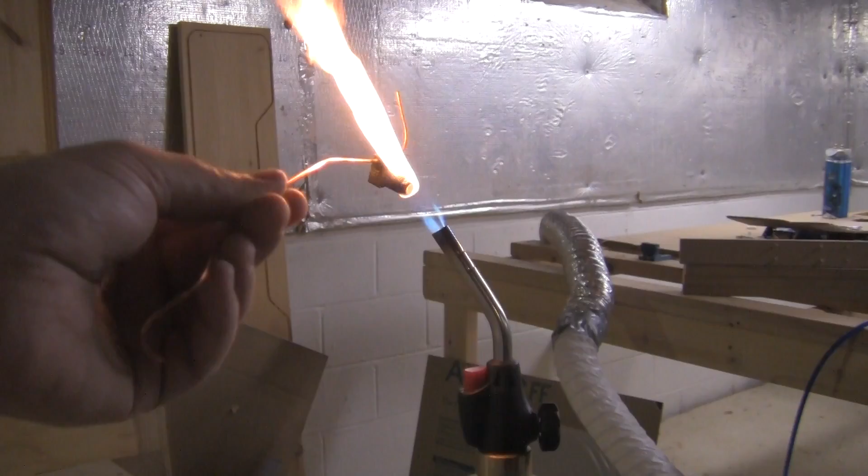It's been over 2 months since the last proper video, but I've been really busy. I designed a CNC router, I've been working on Nephele's Pelvis. In this video we're going to talk about the gearbox for Nephele's Pelvis. I'm going to give you a preview of what's to come with the router.

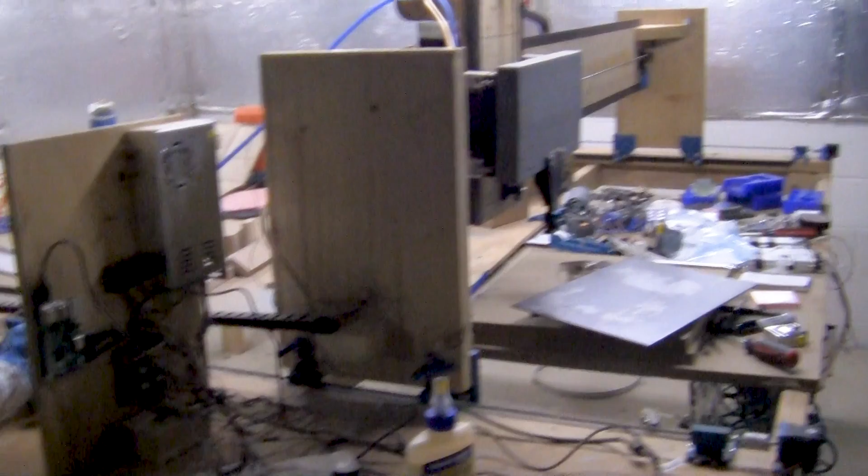Let me start by talking about the FerrousCNC. It's an all-steel CNC router. I wanted something a lot more rigid than the flimsy wooden one that I built down in the basement. So I designed and am in the process of building an all-steel version of that, should be extremely rigid, more than capable of milling and routing various types of materials.

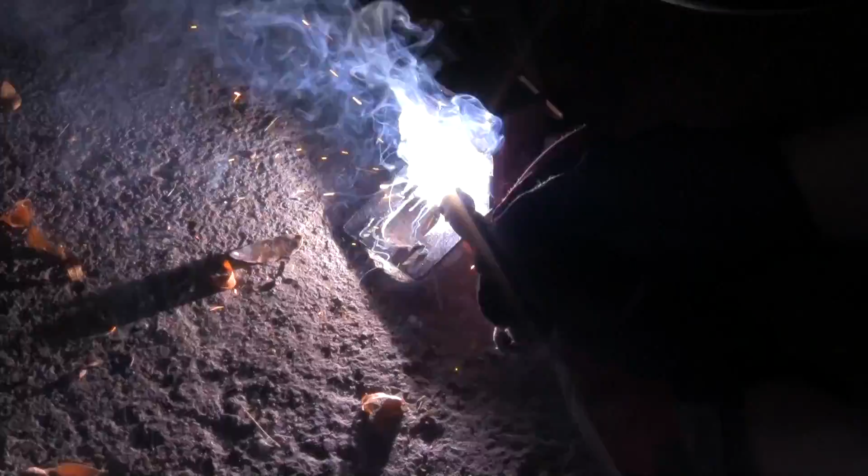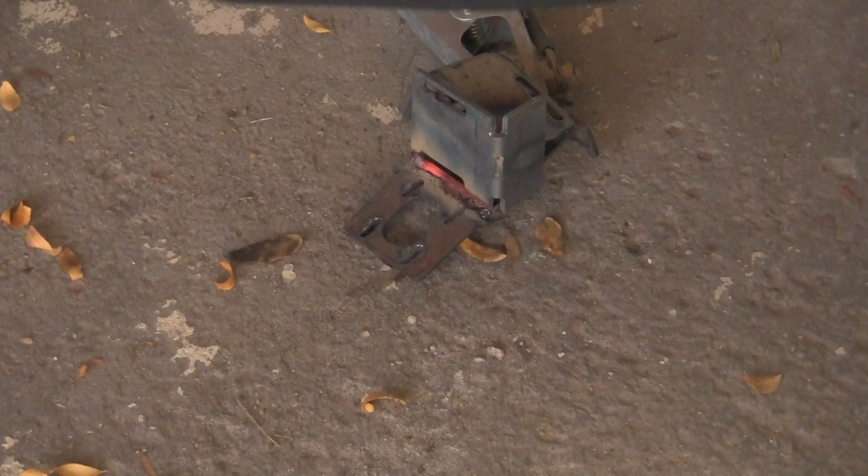Some of the parts need to be welded together, and I wanted to make sure that my welder was still in good working order. So I broke that out, took some of the test parts that my dad sent me, and attempted to weld, figured out what was going wrong with my welder. It turns out that some of the wire inside the cord was corroding, and I was able to pull that wire back out, and then everything worked very well.

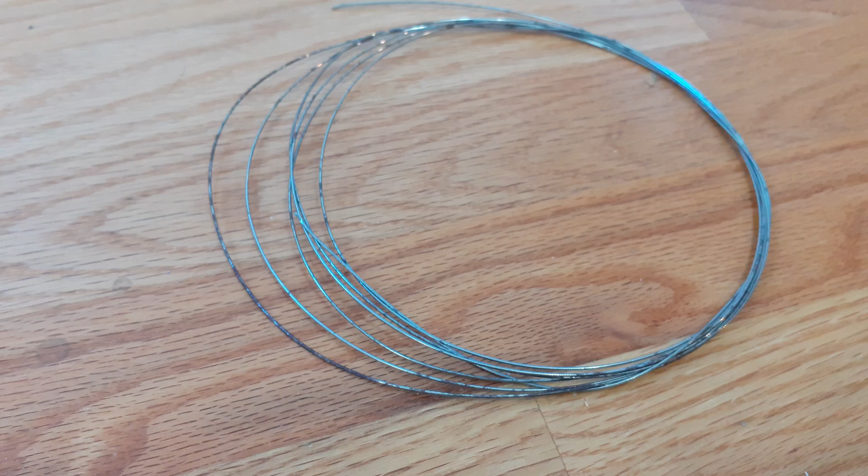In this video, I'm going to show you the first version of it. I actually started over from scratch after 13 hours in CAD, because I took what I had after 13 hours and I posted it on Reddit, and I said, hey, check out what I made. It's like 13 hours into the design, and people came back with some feedback of like, it seems like there's a lot of torque going on.

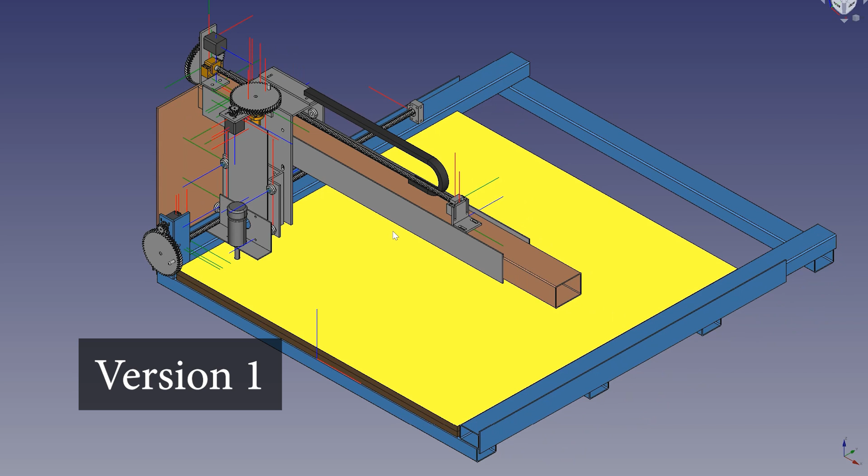I took that to heart, and it was obvious I should just kind of adjust the design, and it was easier to just start over from scratch and rebuild it all up than go back and modify all the little pieces. So the version you're going to see in this video is the first iteration, up to the point where people said you could probably do that a little differently and get better results.

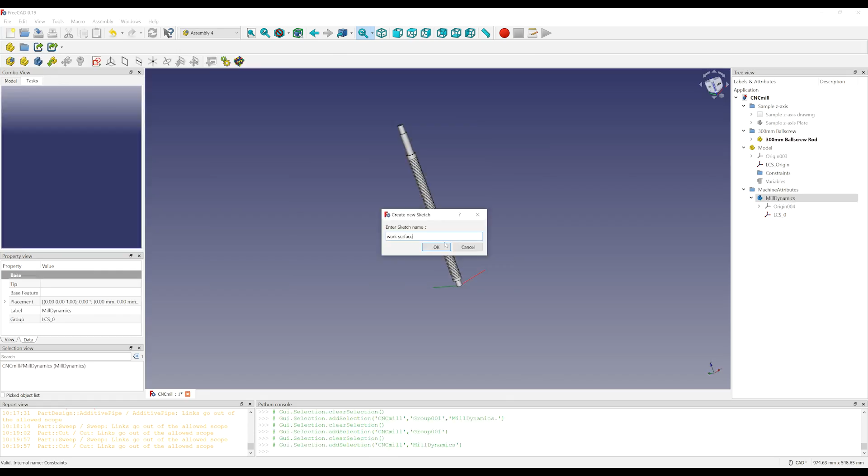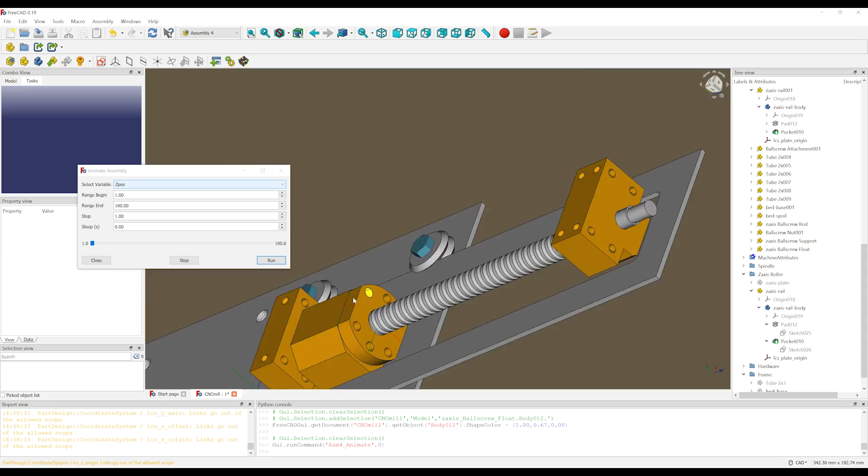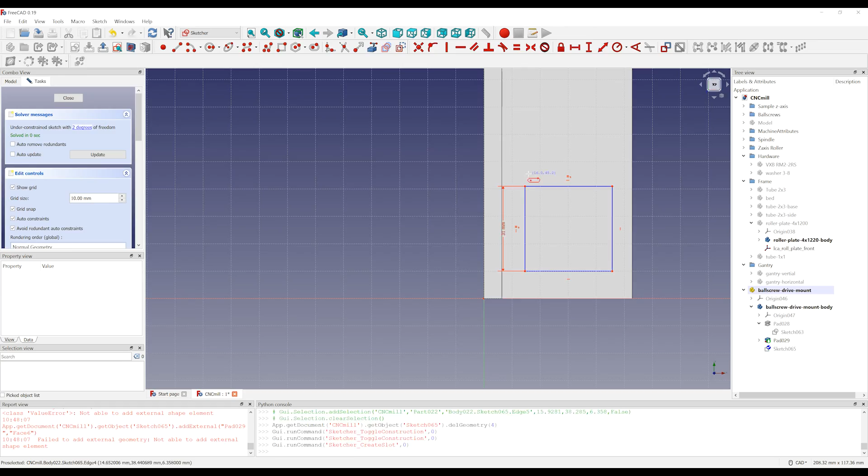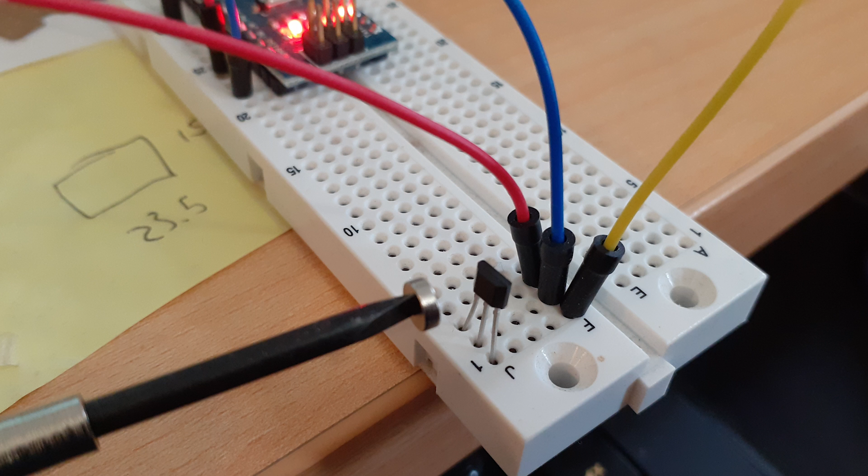I took a crack at using a Hall sensor for position detection using the detection of magnetic fields, and I was really excited about that. It turns out that's really, really easy. Let's do a little time lapse of the coding for the Arduino to read from a Hall sensor and send that data through the serial port.

And that's literally it. It's like 5 lines of code. It's so cool. It's just awesome how easy and painless this is. And if we go and we move a magnet around in front of the sensor, then we can easily see that it's very accurately, very repeatably and reliably detecting the magnetic field at the sensor.

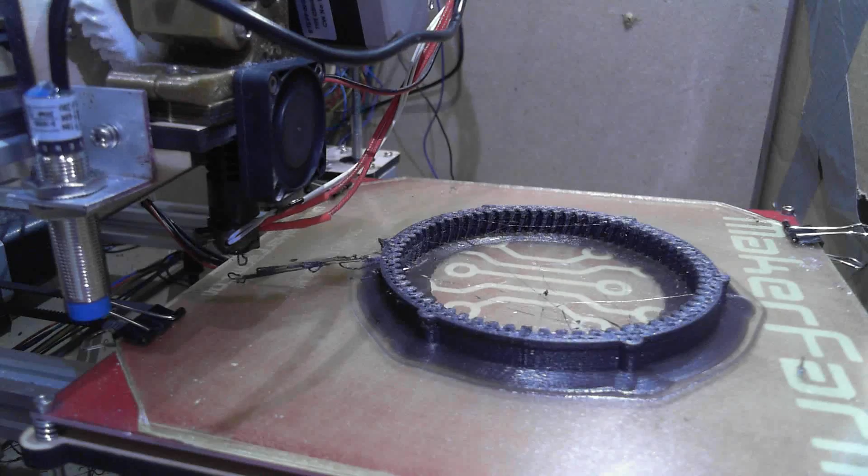I read a little bit about nylon as a printing material, and I looked into some videos where people were doing nylon, and holy smokes, it is super cool. It is also very difficult to print. The parts I printed are really tough. They're unbreakable. There's amazing layer adhesion. There's like no wear. The nylon will just flex rather than abrade. I tried filing it. I couldn't file it.

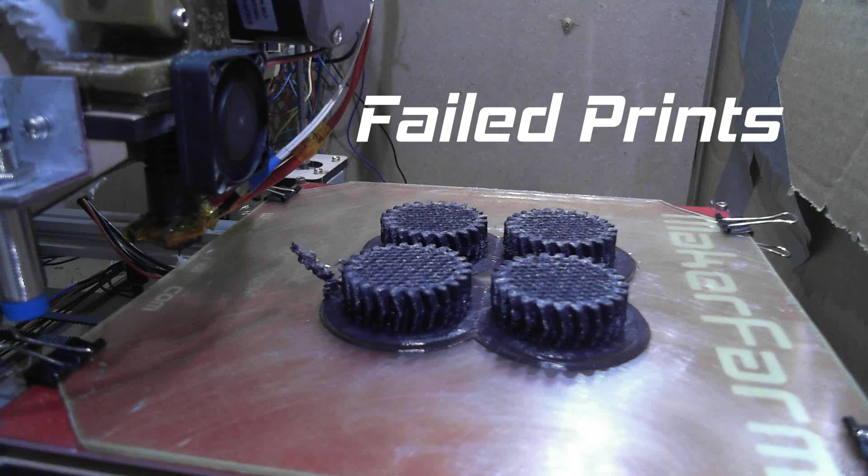The only way to remove like hairs and stuff from the print was to shear them off with a razor blade. But you have to print a little hotter. The pressures are a little weirder because it's more like printing a rubber band than printing something solid. At one point, the hot end for my printer was completely encapsulated in just a solid ball of nylon.

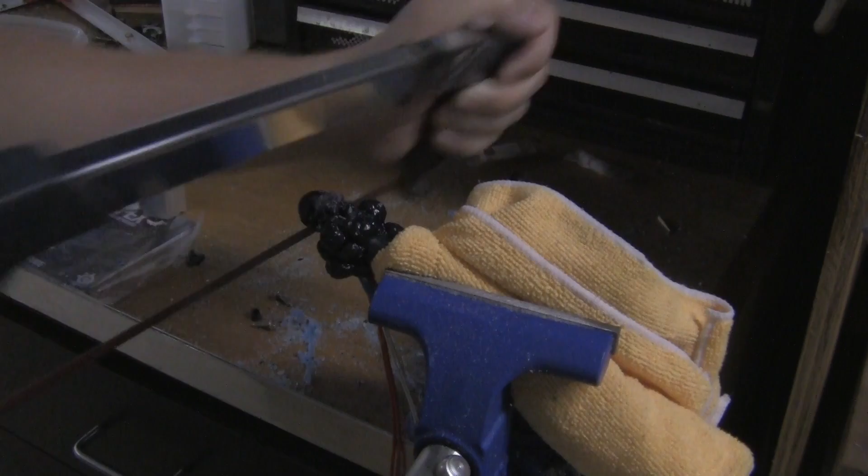And I had to use a hacksaw to cut the nylon off piece by piece until eventually I could get the hot end out and get everything taken apart. And then I had to burn the nylon out of the hot end with a torch, put it all back together. I got a couple more prints out of it, or at least attempted prints out of it.

Nylon is also extremely hygroscopic, so in just the 2 or 3 days that the printer was down the first time, it absorbed so much moisture that it was unprintable when I finally got my printer working again. Then I went and bought a toaster oven and baked the nylon for 6 hours, and then it was mostly printable again, but the printer broke after just 2 or 3 more print attempts.

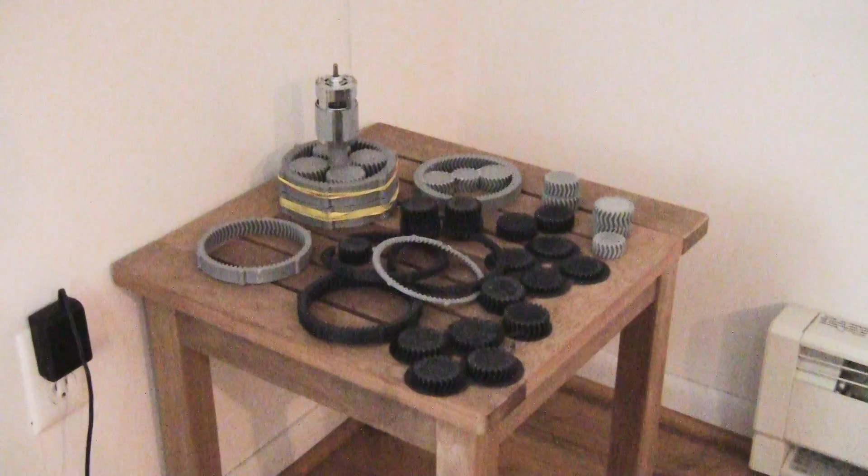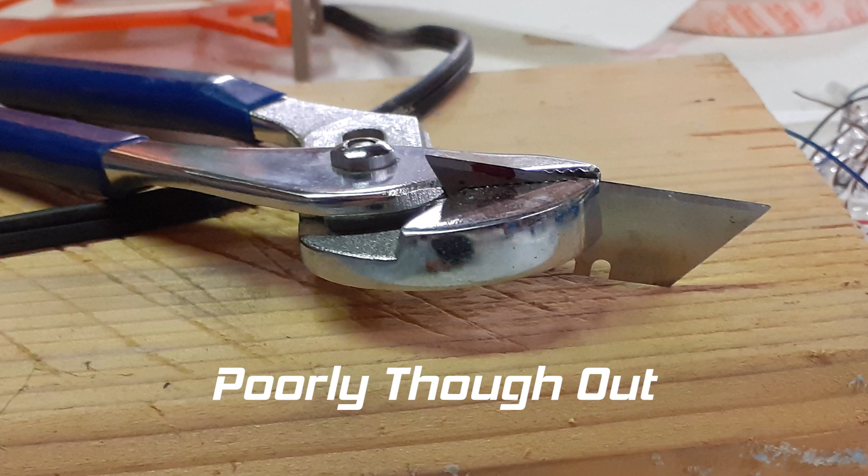I also discovered it doesn't adhere to PEI sheets. I had read that PEI was a good printing base for printing nylon. That was not true. I had to flip the glass over so the PEI was face down and then use hairspray. I was able to get maybe 4 or 5 workable parts. My printer broke twice, and then I almost cut my knuckle off of my finger. And that's when I was like, okay, too much with the nylon. This material is just a little over my head right now.

I want to keep making progress on the gears and the pelvis, so I'm going to just print it in ABS. You know, it turns out nylon's fantastic, so I'm going to look at that more seriously in the immediate future once my printer is upgraded to the point where it's up to the challenge of printing nylon.

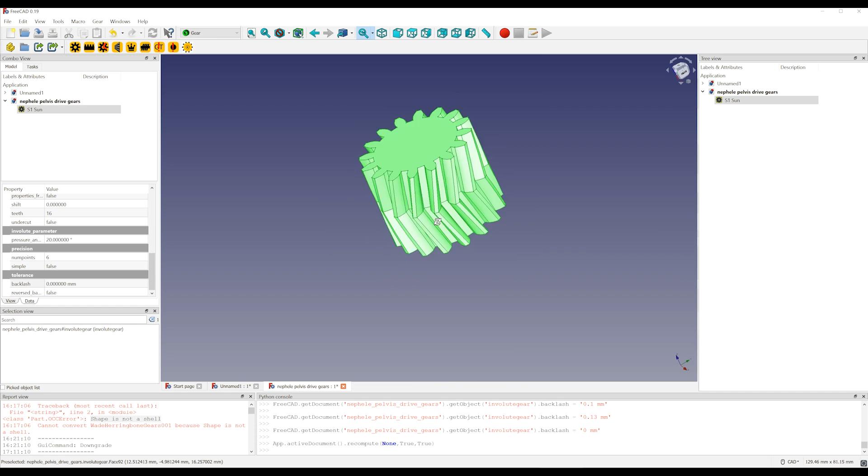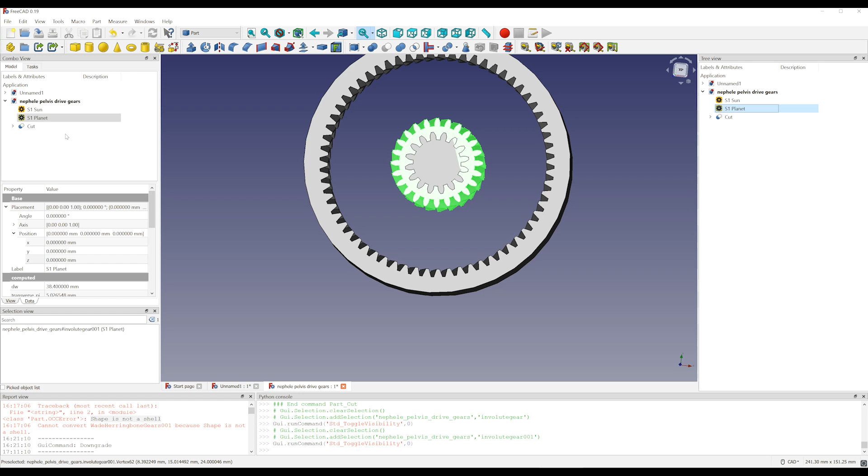So one of the big discoveries I made just now, in addition to the Hall sensors, which are awesome, is the Gears Workbench for FreeCAD. At first I didn't want to use it because I didn't like the tooth profile of the bevel helical gear that it was producing. The teeth just looked a little too trapezoidal, like they were missing the involute detail that I was expecting. So I didn't use it at first, and I posted a video of making these planetary gears on Reddit, and somebody was like, hey, have you checked out the Gears Workbench? And I said, yeah, but I didn't really like it. I stuck with the involute gears because I knew what I was doing there.

But later I went back and looked at it again because I had read some stuff that showed how you could adjust the gap between the teeth. You can add backlash, you can increase or decrease the amount of space into the tooth or at the tip of the tooth sticking out. And all those adjustments allowed me to accommodate the fact that my printer is going to go about 1/10 of a millimeter past whatever the boundary is set for.

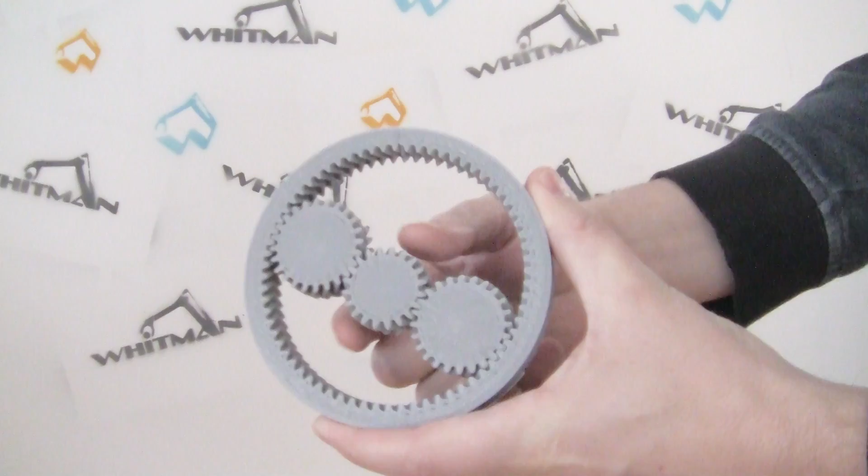So that means normally when I print teeth, they will never properly mesh. The tips will always be butting up against each other, and that's as much engagement as I could hope for. But now with the FC Gears Workbench, I'm able to reduce the size of the teeth so that they print to exactly the size they're supposed to be. And that means I can have full tooth engagement in my 3D printed parts.

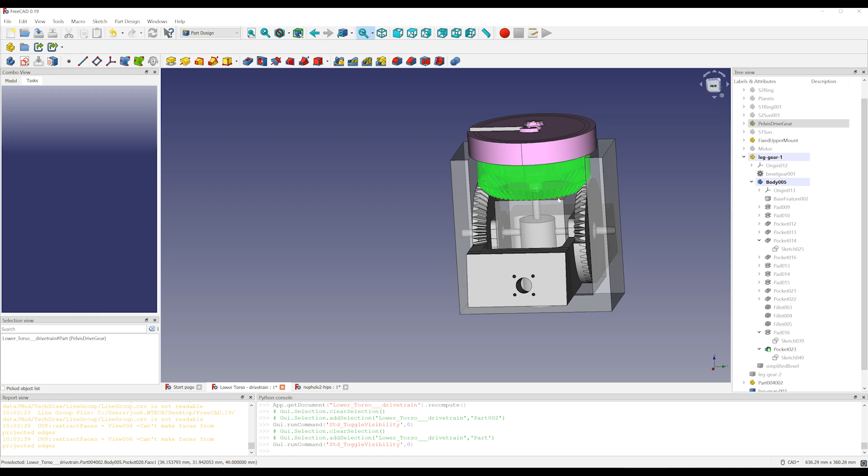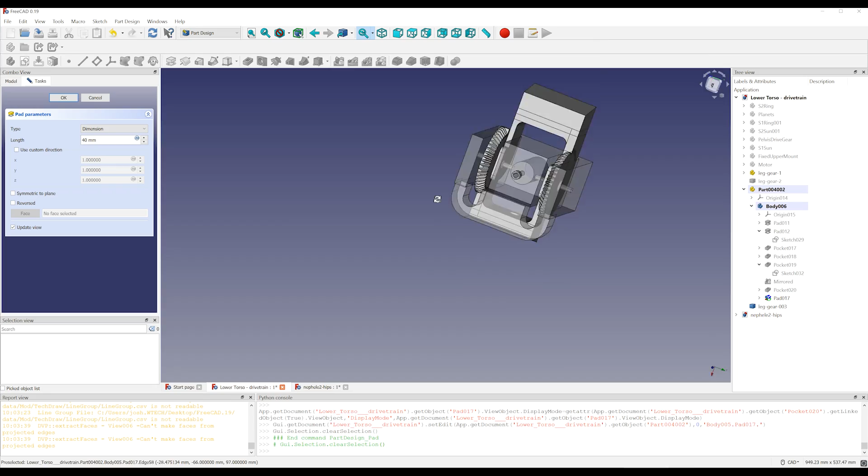And Nephele's pelvis is going to be a set of bevel gears that, as the central bevel gear rotates, causes the linkage that goes from the pelvis out to the hip to raise and lower on both sides opposite each other, which is essentially what we want: the ability for the legs to move apart and together and to actually cross over past each other.

I kind of imagine somebody roller skating and how their back leg would be up in the air and move behind them. Because Nephele is on wheels, Nephele is going to operate a lot like a roller skater would. And so I wanted the ability for a whole range of balancing to happen using the legs as counterweights.